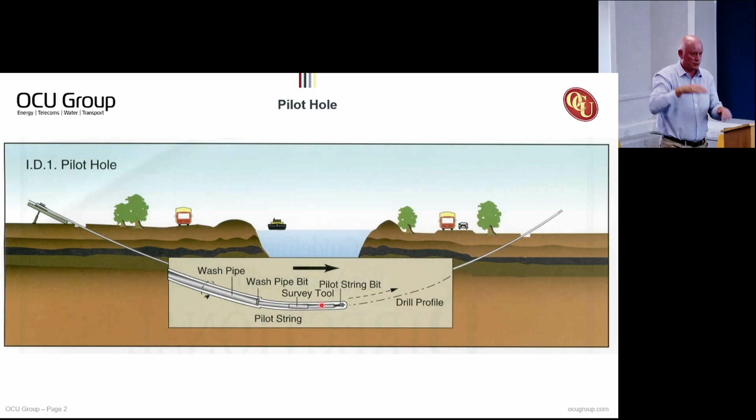But with a real-time steering system behind us, we'll see us deviating from the intended trajectory, and we can correct for it, adjust the drill bit orientation, and through a combination of rotating the whole drill string and sliding the assembly into the ground, we can follow the planned bore path.

So once we've got a pilot hole through from entry point to exit point, we take off the steering system and the pilot hole drilling assembly, and we put a hole opener or a reamer on the far side, and we pull that back towards us. And as we pull that towards us, we add drill pipe on at the far end, and we might pull 2 or 3 reamers through. The onshore drills on Orkney will be conducted like this.

We'll drill with a 6 3/4, 7 5/8 inch pilot hole, and then we'll hole open to 15 inches, and then we'll hole open to 20 inches, and eventually we'll get a 26-inch hole that's big enough for the cable duct bundle.

It's slightly different at Warebeth because we're trying to minimise the amount of work we're doing out at sea, for health and safety reasons, the weather window you need to work out there, and for cost. So we're trying to do as much as we can from the onshore position.

So for the landfalls, we've drilled the pilot hole and stopped just short of punch out onto the seabed. We've pulled the assembly back and we're forward reaming, we're pushing the hole openers into the ground and opening the bore up first from 12 1/4 inch pilot hole to 26 inches, and then 26 inches to 36 inches before we push the 630mm cable duct into the bore. So we're trying to do as much as we can from an onshore location there, so it's slightly different.

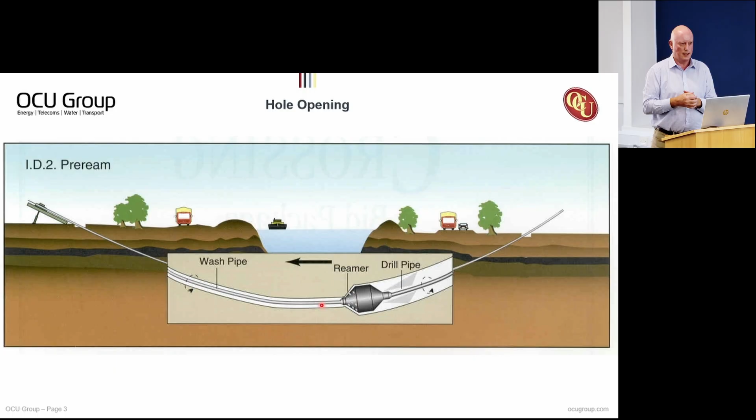But, yes, can I just ask, it's a technical question. So when you describe the angled turn, if you like, am I right in thinking that the hole diameter at that point will be the diameter of the drill bit, but when you straighten up, then it drills a slightly bigger hole because the eccentricity has to go around the whole diameter? Is that right? So the hole almost is thin at the turns and then thicker on the straight bits.

That's correct. But once you've drilled, we very rarely drill from entry all the way to exit. Every now and again, you'll stop. As we're drilling, we pump the drilling fluid down the drill string. It not only powers the downhole motor, it comes out through nozzles in the drill bit and it carries the cuttings out of the bore. If you can't remove the cuttings from the bore, you don't have a hole down there. So you're suspending those cuttings in the drilling fluid.

Every time you stop, the joints of drill pipe are 9.5, 10 metres long. So every time you stop pumping to put a new joint of drill pipe on at the drill rig, you're relying on the drilling fluid to suspend those cuttings. But when you're drilling horizontally in a 12 1/4 inch bore, they've not got very far to fall before you build up a cuttings bed on the low side of the hole. So you need to keep agitating that and putting the cuttings back into suspension.

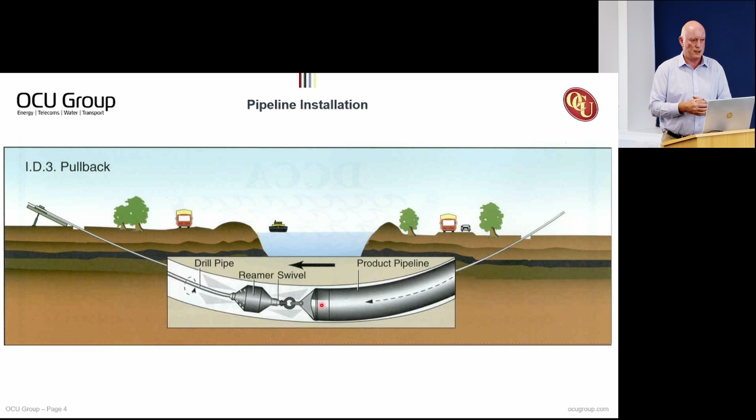And the reason we build that in a single go is when you start pulling the pipeline into the ground or the cable ducts into the ground, you lose all the mechanical control over the bore because you're pulling the drill pipe and the hole openers out. So if you start to lose borehole integrity behind you, it's very difficult to do anything about it. So you want to get that product line in as quickly as you possibly can. So you don't have the time to stop and weld and test and pull another 10 metres and stop and weld and test. You need to pull it in as soon as you can before the quality of the bore starts to deteriorate.

Can I ask a question? Yep. At Warebeth, you're saying you're pulling it out to sea. Yeah, but pushing the pipe in. You're pushing it rather than pulling it in, yeah. Okay. And then at the last stage, you're going to cut through into the seabed and let the water in. Yes. Well, once we've got the hole up to 36 inches, then we'll punch through out onto the seabed and finish that last section of drilling off, pull the drilling assembly out and push the cable duct in. Okay. At that point, it floods, presumably, yeah.

Yeah, of course it is. When we're pushing the duct in, yes, it's got vents in the front of it that allows it to fill. Because if you push an empty sealed pipe in, it would float in the drilling fluid and the water, and it would push itself against the high side of the hole. And you wouldn't be able to overcome those friction forces pushing it in. So yes, as we push it into the ground, we allow it to fill with drilling fluid and with seawater so that it reduces the buoyancy and takes a lot of that frictional drag off the high side of the hole. So yes, it's going to be full by the time it's pushed in. Okay.

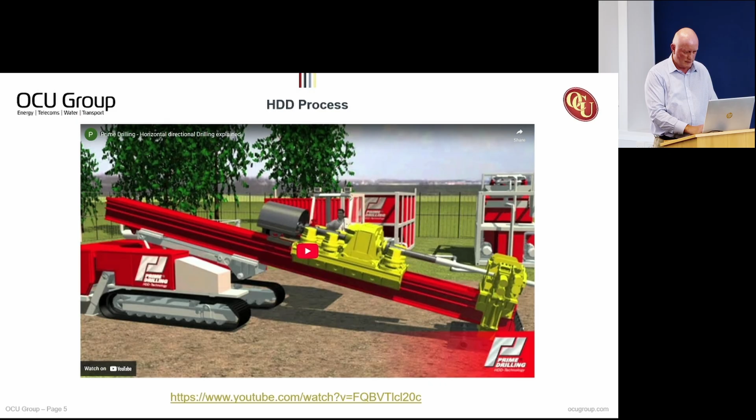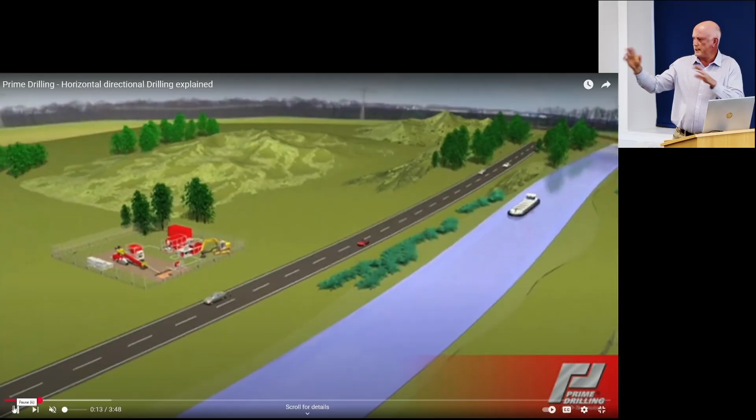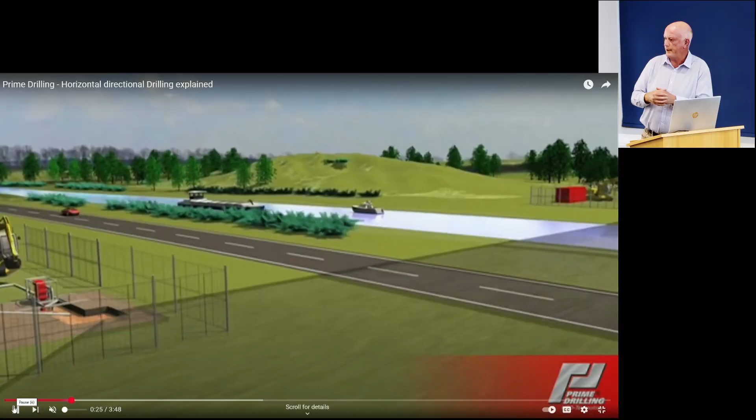Excellent. Okay, so I've got a wee video here that goes through this. So this is a wee schematic of the HDD process. And you can see that the first thing is that the only excavations we have are these small pits. We talked about pumping drilling fluid down the drill string that carries the drill cuttings back out of the bore. So these small pits at entry and exit point are the only bits that you would see on surface.

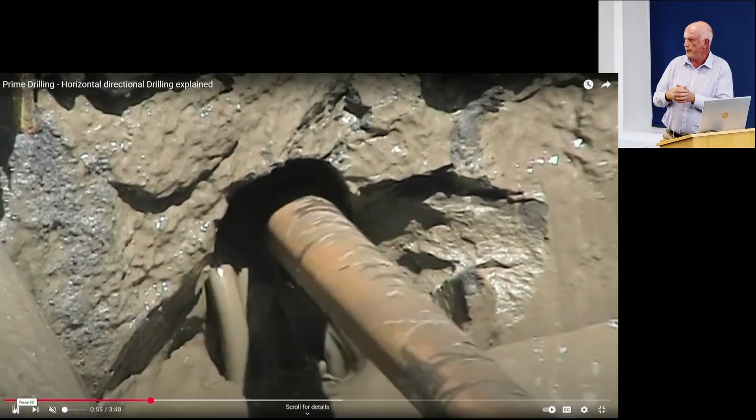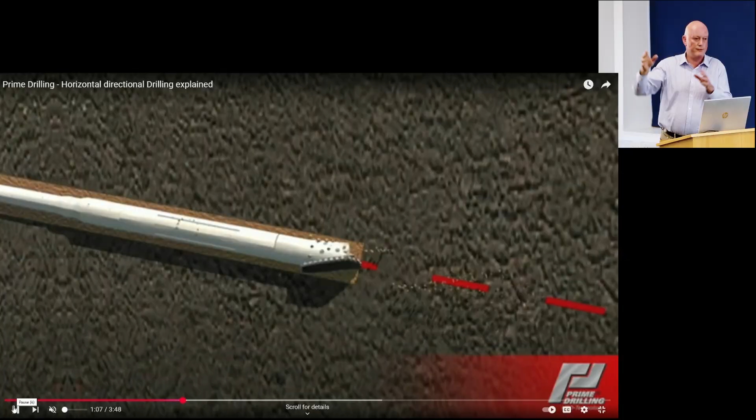So we're adding the drill pipe as we push the assembly into the ground. And we're following the trajectory. There you can see the drilling fluid coming back up the annulus, carrying all the drilled cuttings with it. That slurry, the solids laden slurry, we pump to a recycling system, and that removes the solids fraction and allows us to reuse the clean mud. So it minimises the volume of water or volume of fluid that we have on site. So is that bentonite you use as a fluid? Yeah.

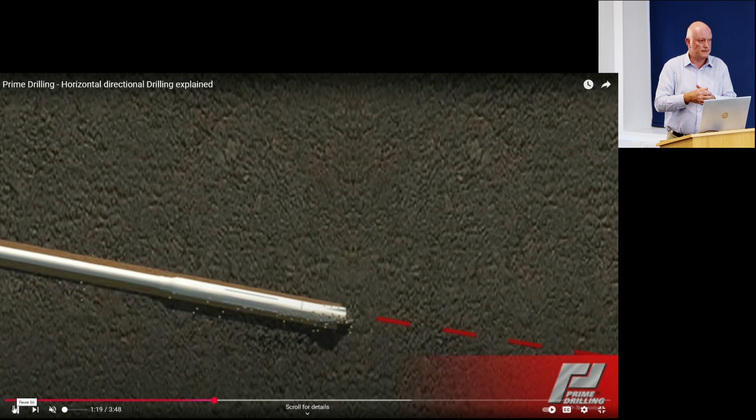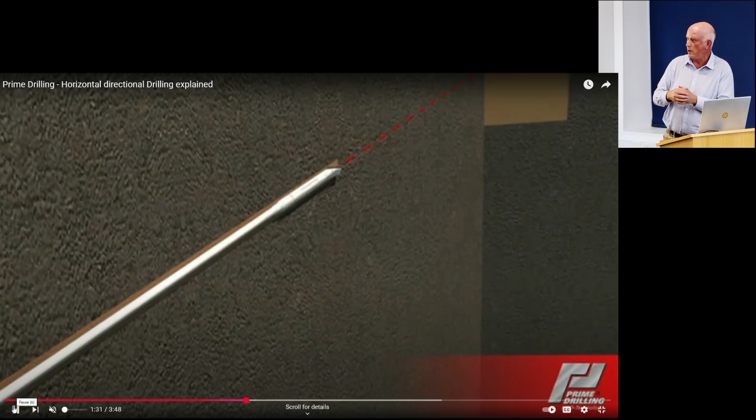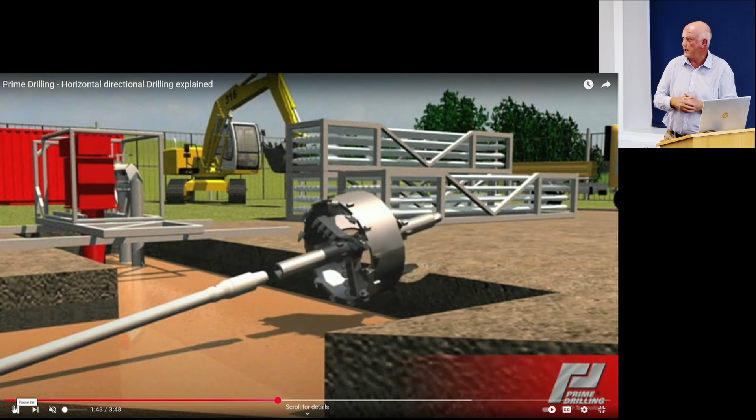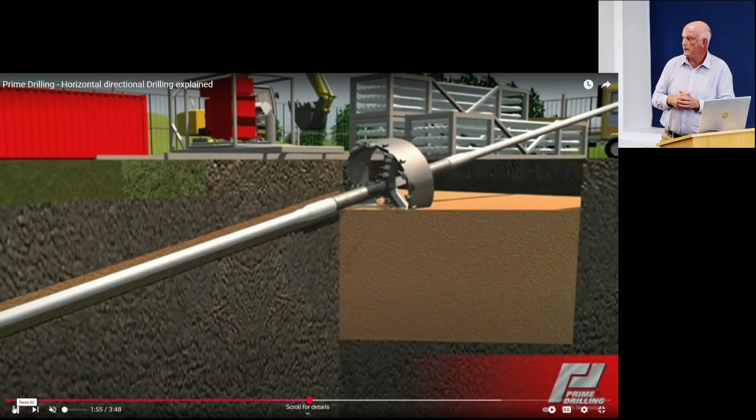And here we can see the rotation of the drill pipe following the bore path. And as we start to deviate from the bore path, we stop. Well, that's stopping to add another joint of pipe. But the previous bit, you could see the drill pipe sliding rather than rotating. And once we get to the exit pit, we take off the pilot hole drilling assembly and we pull the hole openers back towards us. Again, pumping fluid into the bore, out through nozzles in the hole opener, and flushing the drill cuttings back to surface.

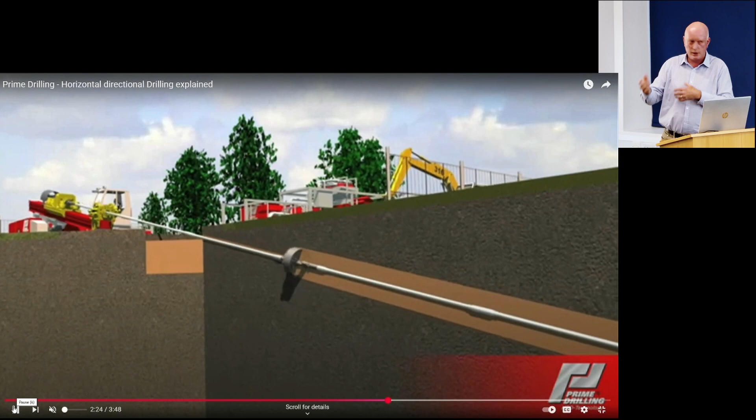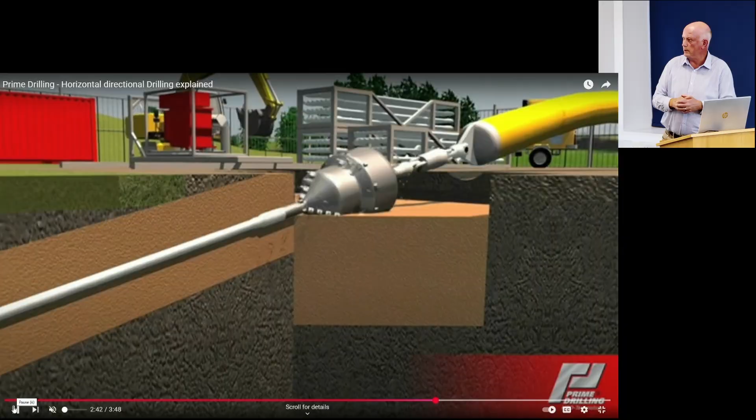So now, because we've got a larger bore behind the drilling tools, the drilling fluid is taking the path of least resistance, which would be up through the big hole rather than forwards through the small hole. So we have to have a system of management of drilling fluid to get the fluid from the exit point back to the entry point, usually done with tractors and tankers on small, relatively small bores like the onshore drills at Orkney. And then once we're back at entry point, we put another reamer on and a swivel behind the reamer so that you can rotate the reaming tool, but the pipeline or the cable duct bundle behind it doesn't rotate.

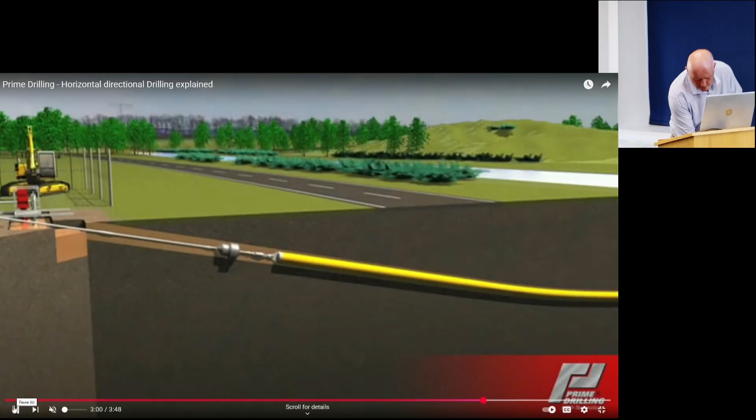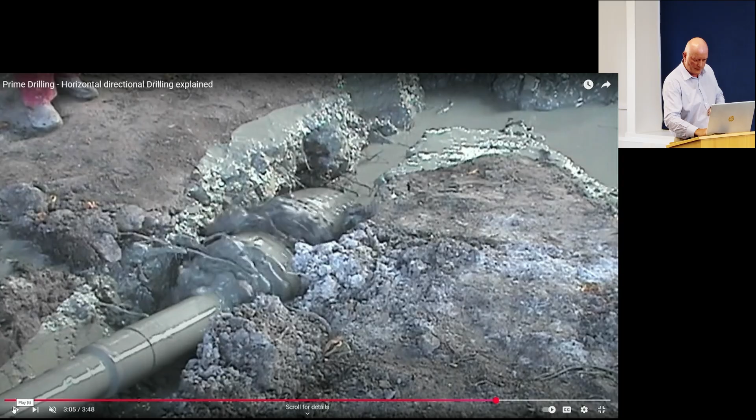So Ross, at Warebeth, this is going to be a pushing job rather than a pulling job, is that right? Yes, yeah. So we'll show you in a few slides' time the pipe pushing system that we'll use to push the sleeve in the ground. And there you can see the reamer arriving back at surface.

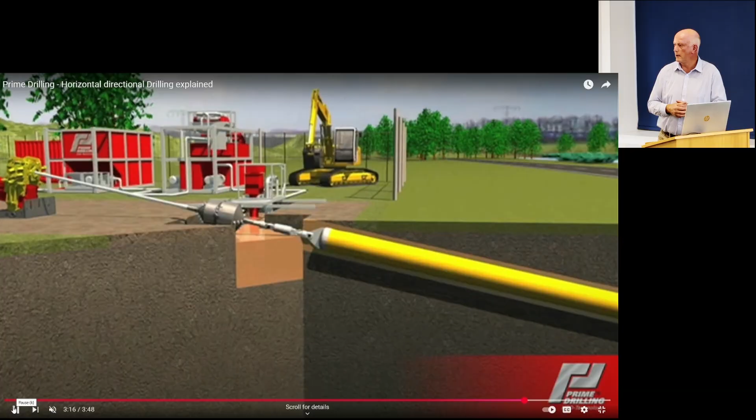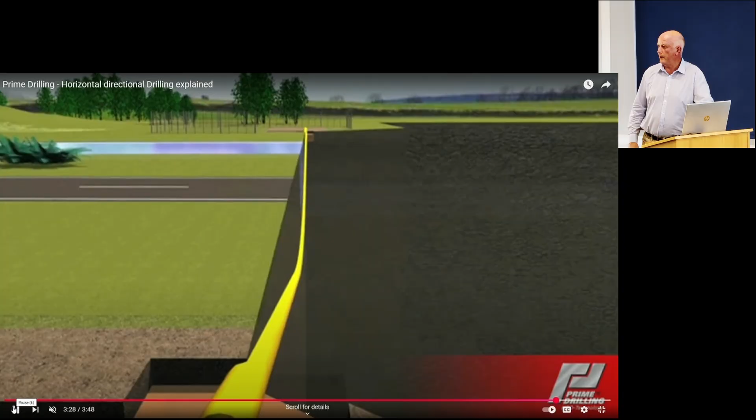Remove the assembly, cut off the end of the pipes, and what you're left with is a horizontal directionally drilled sleeve beneath the roads, the rivers, railways, motorways, coastline at Warebeth, for environmentally sensitive areas.

What sort of depth are you drilling down to there? Your measured depth versus TVD. So we'll say that again. Who's talking TVD? So you've got some experience.

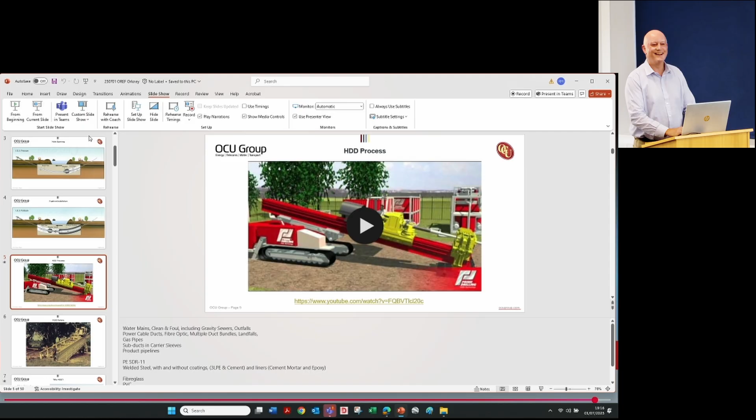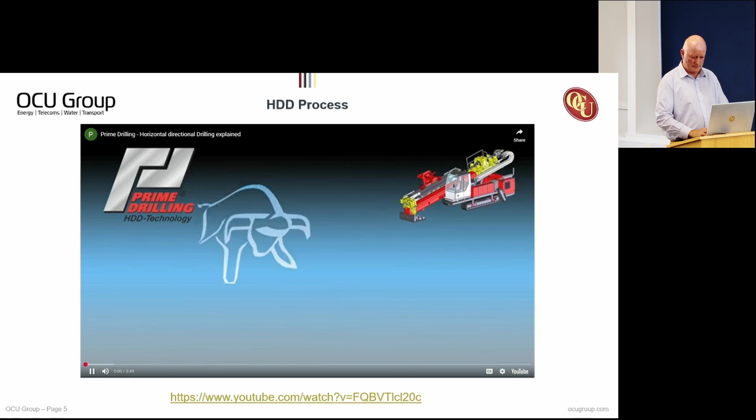So at Warebeth, we're 20 metres below surface level for the majority of the bore. For the onshore drills on Orkney, we've got a 10 metre limit, apart from the burn of Stennis. One of the issues we have with high voltage power cables is they generate quite a bit of heat, and you have to be able to dissipate that heat into the surrounding formation, otherwise they act like a fuse and they just pop. So the electrical engineers have designed the cables and stipulated that we have to be shallower than 10 metres, otherwise the cables can't dissipate the heat into the formation.

The formation at the burn of Stennis is slightly different. The thermal conductivity of the ground there is a bit less than it is at all the other onshore drills, which is why we're limited to 7.5 metres depth of cover.

From a directional drilling perspective, we would always want to be as deep as we can. The deeper you go, the more competent ground you get into, the further away you are from any surface infrastructure. You don't have to worry about heave or settlement or disruption of other services. And when you're drilling an arc, going another 10, 20 metres deeper is only going to add a metre and a half, couple of metres to the length of the drill.

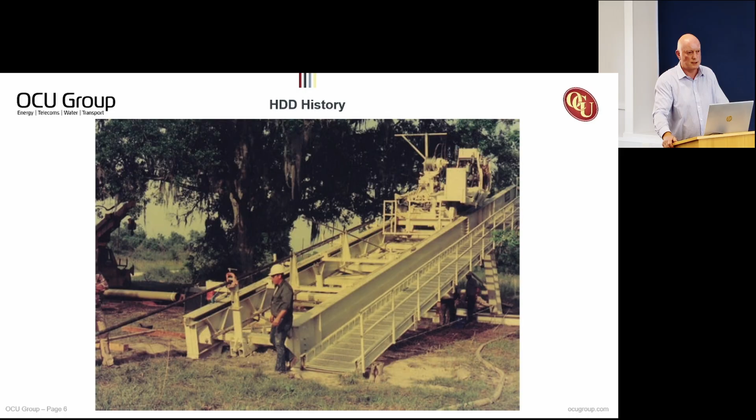So why do we directional drill? Well, obviously we're trying to avoid sites of engineering difficulty, SEDs, we call them in the civil engineering business. So that might be a road, a motorway, it might be a railway, it might be a canal, it might be a river. It might be a site of significant environmental interest.

You might be trying to avoid invasive species. We do some drilling where we drill underneath Japanese knotweed, for example. We do some drills where we drill underneath ponds that have got great crested newts in them. We do quite a bit of work in brownfield sites, putting pipelines and cables underneath contaminated land. You don't want to be trenching through ground that's heavily contaminated. We did a job in Doncaster in the locomotive works where the ground is full of asbestos they used to use to lag the old steam train boilers.

But by drilling beneath the asbestos, you can avoid all that environmental impact. But there are other applications as well, social implications. So rather than trenching down the high street and disrupting all the traffic and the business access, we just take a pit out at either end of the high street and drill down. We can avoid schools, we can avoid sports pitches. So there's a lot of social reasons for

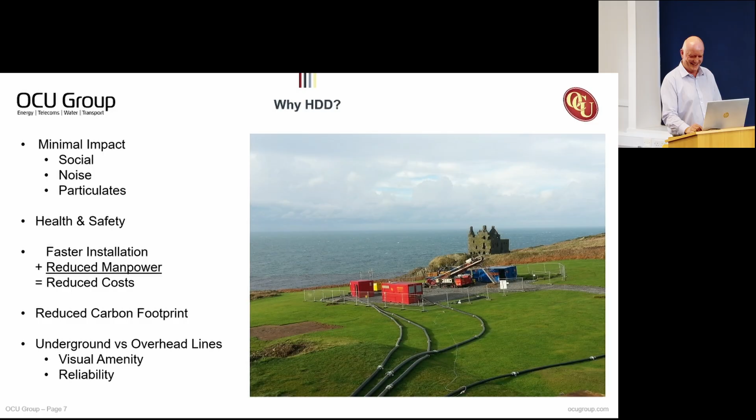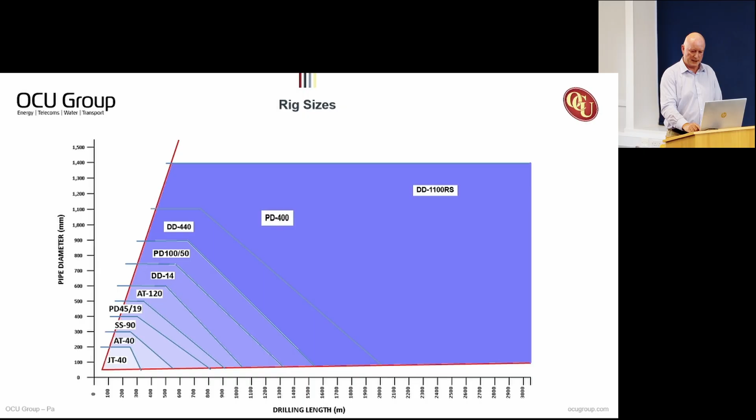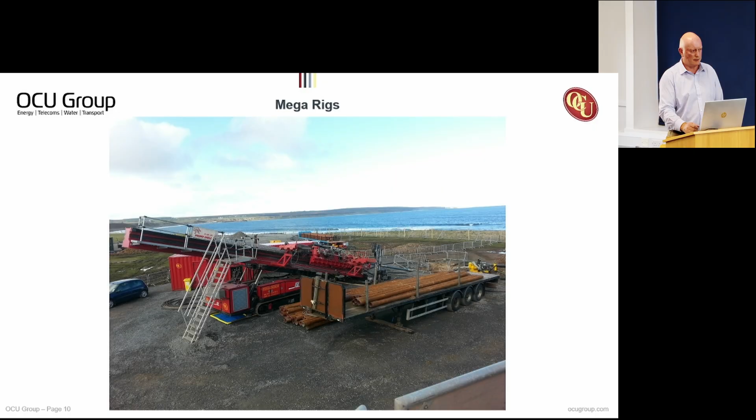Here's a couple of pictures. That's a mini rig doing a railway crossing in Cumbria, and there's a maxi rig. That one's on the Caithness coastline, putting in the MeyGen tidal turbines. I don't know if you're aware of that scheme.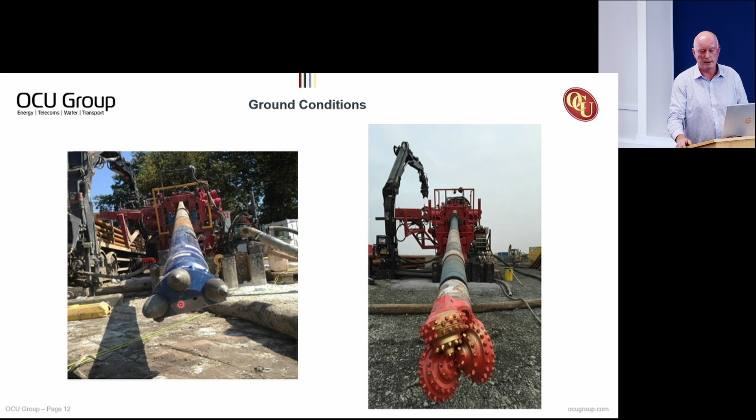So the hole openers, and again, as we say, they come in different sizes. You pull a series of them through. You don't want to open that hole up in one go because you would overload the drilling fluid with drill cuttings and make it too heavy to pump. So you take it out a little bit at a time. And there's an infinite number of different styles of hole opener and drill bit available, depending on what ground conditions you're drilling through.

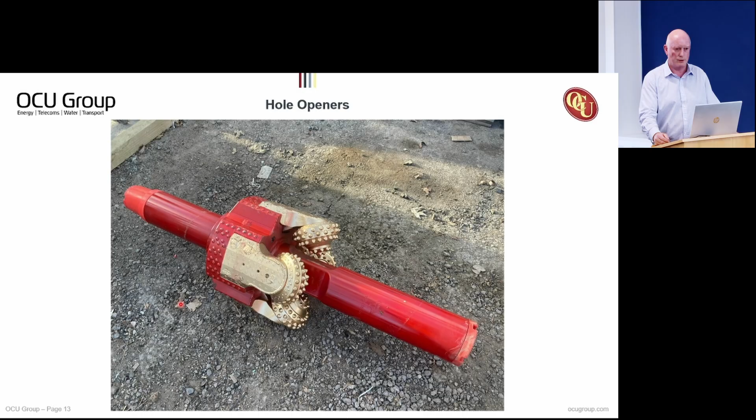The drilling fluids, we talked bentonite drilling fluid, so it's clay platelets mixed in a fresh water suspension. There's a little bit of viscosifier in there to help the carrying capacity, but it's quite a complex fluid. What you're trying to do is get that fluid to suspend the cuttings as soon as you stop pumping it. So it's thixotropic in effect, but you don't want it to set too quickly or too strongly, otherwise it takes too much pressure to get it going again. So it has a very quick gel strength, but a very low shear strength.

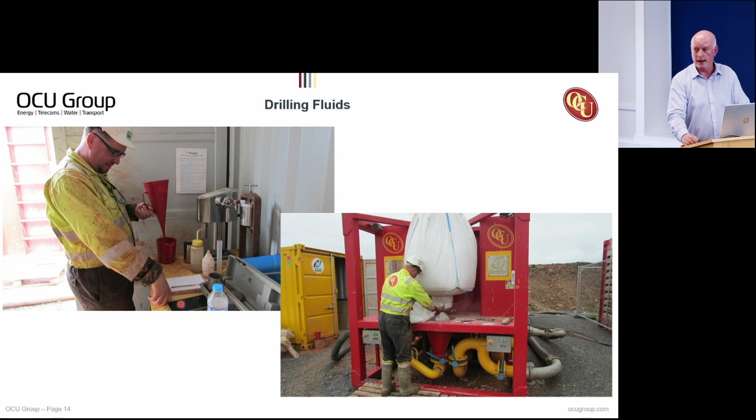If you think of it as like trying to get the ketchup out of the bottom of the bottle, and you keep banging away, and then the shear strength goes and you get all the ketchup at once. That's exactly what we're looking for. High gel strength, but low shear strength. And it also has to cool all the downhole drilling equipment. It has to lubricate the drill string, and it has to support the bore as well. So you can see in the top left-hand corner, that's the fluids technician. He's constantly measuring the viscosities, the weights, the densities, the pH, the chloride content of the fluid to make sure it's doing what we want it to do.

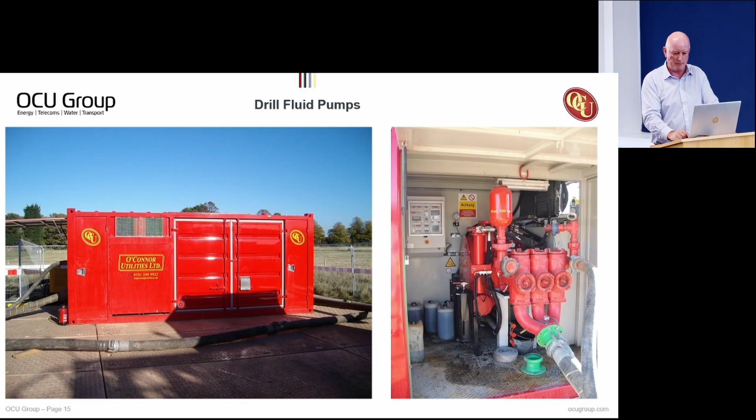These are the pumps. We've got some bigger pumps down at Warebeth than these ones, but these ones are oil field style cement pumps. And this is the recycling system. So the slurry laden fluid comes back to surface. We pump it up to the right hand shaker here, and that removes the coarse material from it. And the clean mud drops down into the tank and gets pumped up through a series of shakers. Now, the shakers are different sized vibrating screens, and they get finer the further down the fluid stream you work. So it gradually takes out more and more of the solids.

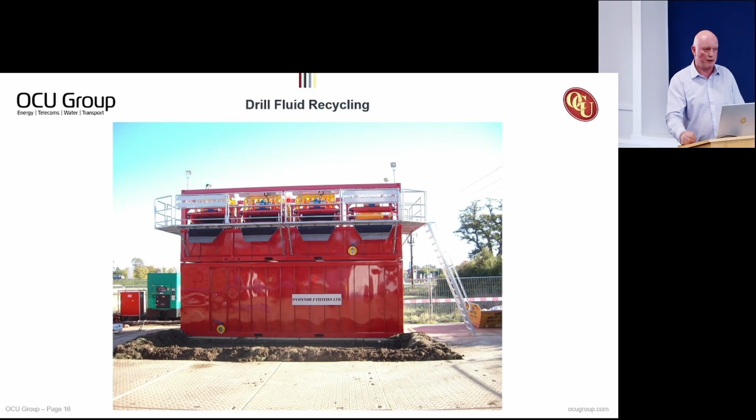And also on top of those, the last three here, you can see there's a series of hydrocyclones that spin the fluid, acts a bit like a centrifuge and spins the solid content out of it. So that takes the solids down to about 25 micron, which is clean fluid. The last thing we want to be doing is pumping dirty fluid and sands through our pumps and downhole, through the motor, through the steering tools, and wearing them away. So it's very important that we maintain a clean drilling fluid.

Of course, you've got the butt fusion welding of the cable duct. This is what you'll see snaking over Outertown Road, but it'll be the same process for the smaller ducts on the onshore drills. These polyethylene sleeves, they're heated up both ends, and then they're pushed together and they weld together, they melt together and form a single joint.

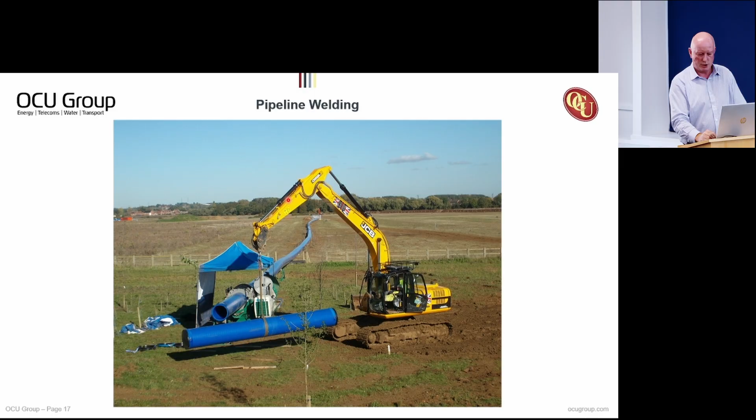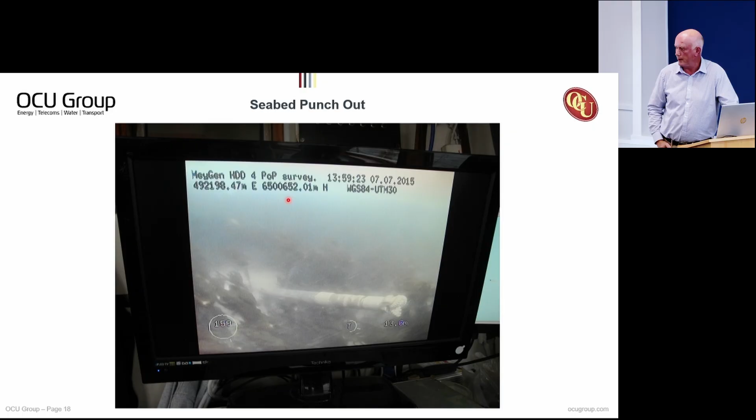So that's a picture of the drilling assembly popping up on the seabed in the kelp forest on the MeyGen job on the Caithness coastline at Ness of Quoys, Gills Bay. You can see the kelp in the background there, and the drilling assembly with the drill bit coming out of the seabed.

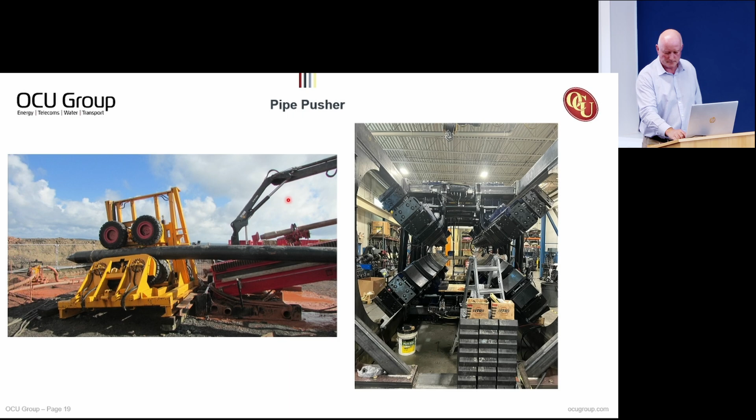So some of the design work we do, before we decide where we're going to drill, we need a topographic survey so that we can make sure we're going in at the right angles and building at the right radiuses and staying deep enough below any obstructions that we're trying to drill under. We do site investigation to figure out what the ground conditions are. The ground conditions dictate what sort of drilling tools we're going to need. The drilling tools dictate how quickly we can build angle, develop radiuses in the bore and how long the job's going to take, which tells us roughly what it's going to cost. So without the site investigation, that's a very important building block in the design process.

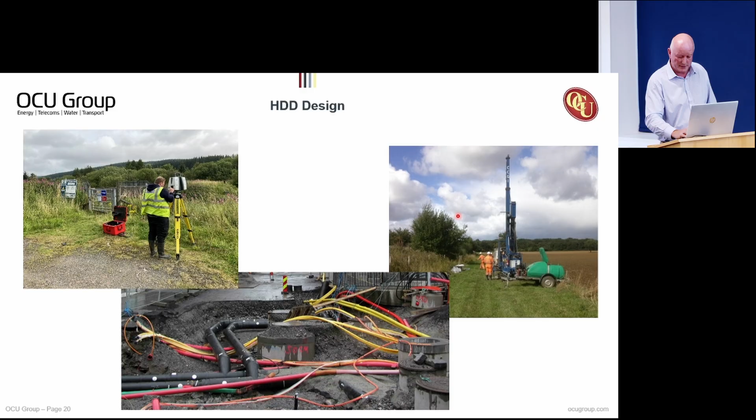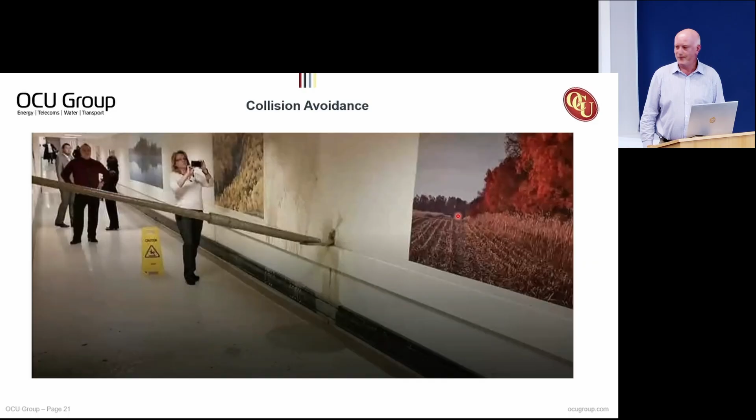The other thing we need to know is what else is in the ground. Especially in urban environments, there's an awful lot of infrastructure already in there. Unless you know where it is, you can't avoid it. So we spend a lot of time trying to trace existing utilities and pipelines, foundations, sheet piled walls. This is what happens if you don't do your survey work correctly. You can see a directional drilling assembly going through a subway. Not the smartest thing.

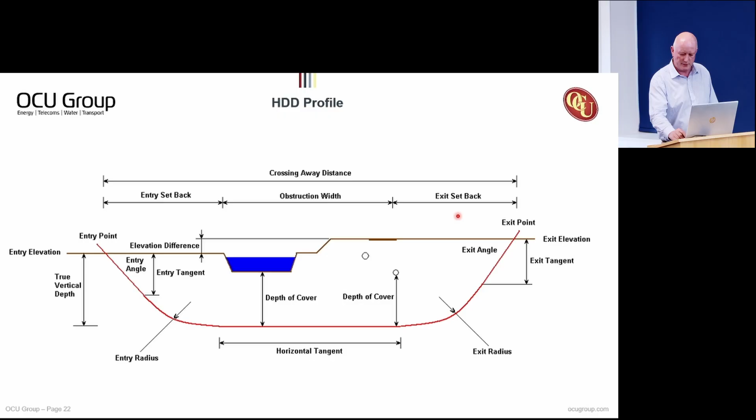The design work we do, again, some of these items are fixed: the topography is fixed, and depth of cover is often dictated by Network Rail or Transport Scotland for depths. Other things that we can play around with a wee bit: entry angles, build rates, lengths of tangent, etc. So there's quite a bit of maths and geometry involved in designing an acceptable profile. This is what happens if you get your profile wrong and your drilling assembly comes up in the middle of a motorway. Again, very American, not us.

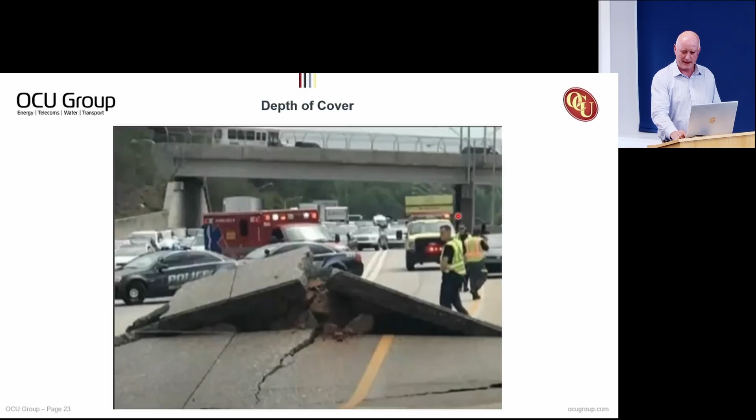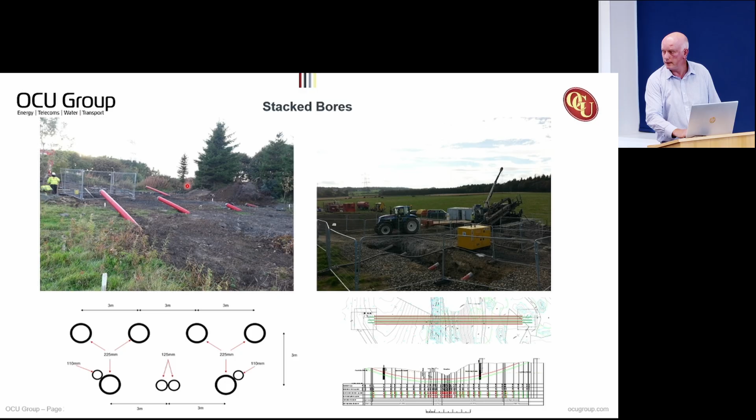We can also stack bores. So this is an example of a job under a railway. This is between Edinburgh and Glasgow, where the easement width wasn't wide enough to put the shots in flat formation. So we've had to stack them, some of them deeper than others. And you can see the shallow ones here and then the deeper ones coming out of the ground at the back of the slide there. So we can be quite innovative with the way the jobs are put in.

We talked there about depth of cover and being limited by power cable heat generation. We can put thermal grouts in the annulus to help us wick that heat away from cables. So that's sometimes a solution to enable you to go in at deeper depths than the electrical engineers might have wanted you to go in at. We can also put cementitious grouts in if we've got potential issues with very soft ground and keeping the ground stable at surface under railways, for example.

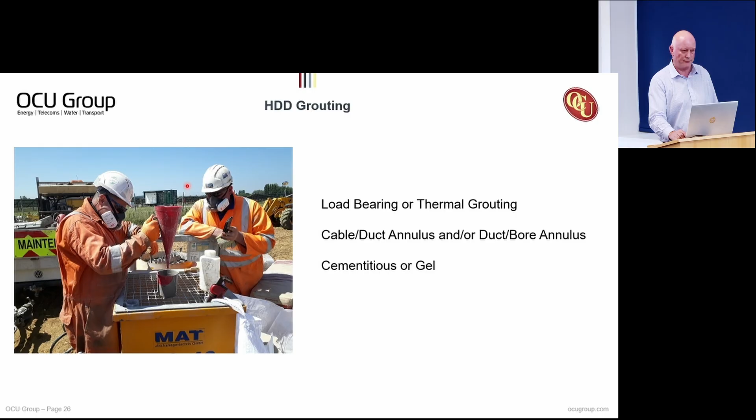So the ground that we're drilling through was a couple of... that one. So feel free to pass these around. That one broke in transit.

But you can see in here it's mid-Devonian siltstone. And if you look closely, you can see what they call bioturbation. There's some little animal burrows in there, and also the deformation of the layers of rock as more and more layers stacked up and squeezed the water out of the underlying layers. It deformed those layers slightly. So you can see the kind of density of the material we're drilling through.

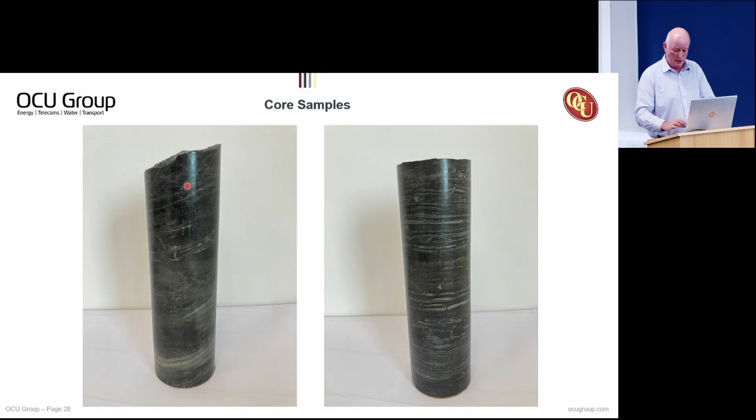Ross, just on the previous slide, the longitudinal section looks like some sort of discontinuity in the geology. Yes, it's upper Stromness flagstones. There's a fault line about two thirds of the way out, right? That faults the upper Stromness flagstones up. So we're staying in the top of the upper Stromness flagstones all the way out.

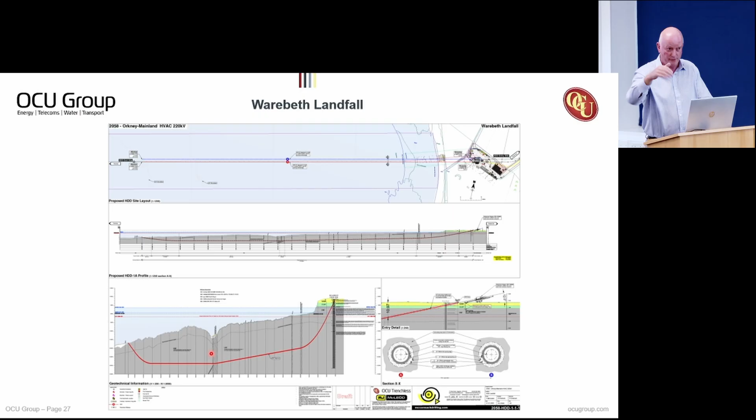I understand from the drillers that we were making ROP of about, so the first 700 metres was about 50 minutes per 10 metre rod, and then when we hit the fault, we got into the harder formation, about 75 to 80 minutes a rod. So the further out you went, once you got beyond the fault, the rock was a bit harder.

How did you find deflection when you went into the different section of the fault? Sorry, say again? Did you have any deflection in trajectory at all? No, it stayed really well. Even either side of the fault stayed pretty similar. Okay. No problems with cave-ins or anything like that? No, or hanging, no, all good.

The other thing we always worry about drilling through fault zones is losing drilling fluid into the fault, into fractured material. But we have maintained full returns all the way through. So, yes, there's a fault there, but it probably sealed up with hydrothermal deposition or something in there to seal it up.

Well, do you come back to that fracking later on, or is this a good time to ask another fracking question? You can ask a fracking question. Yes. If the mud starts circulating through a crack, do you just let it happen until it stops naturally, or do you have an intervention that can plug that?

Okay. So one of the other reasons that we have these recycling units on site that minimise the volume of fluid we've got in circulation is it makes it easy to spot changes in the volume of fluid. So if we start to lose fluid downhole, we'll see it very quickly because we've only got small tanks of fluid on surface. Now, what that tells us is that the pressure of fluid that we're pumping downhole has exceeded the hole's ability to retain that fluid within the bore.

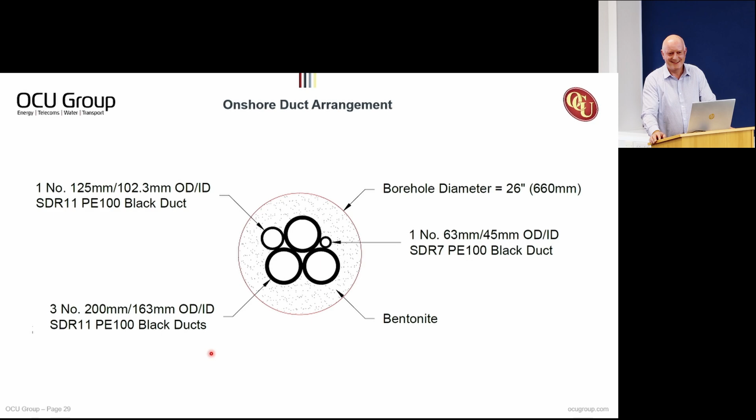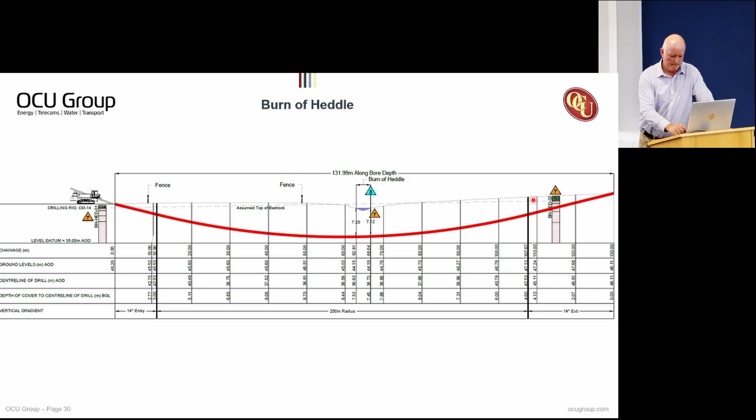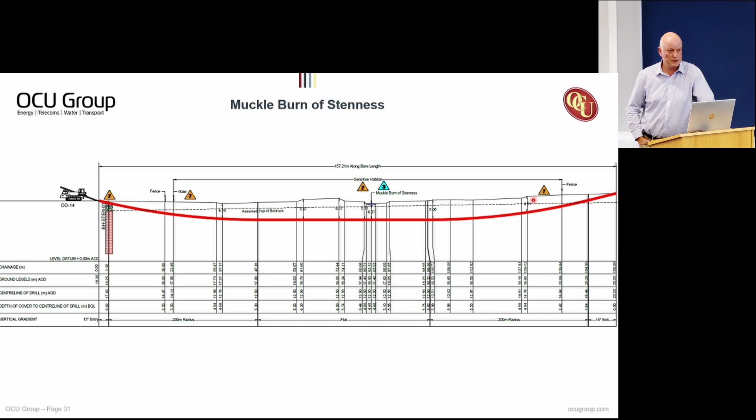The Muckle Burn of Stenness, this is the one where the thermal conductivity of the ground is a lot less than the other drills. So we're restricted to 7.1 metres depth of cover. So our depth of cover underneath the stream is only 4.4 metres. But again, we're in solid rock. You can see the assumed top of bedrock line there. And there's quite a sensitive environmental area across the length of the Stenness burn, which is why we've extended the length of the drill to 157 metres to stay out of the environmentally sensitive area.

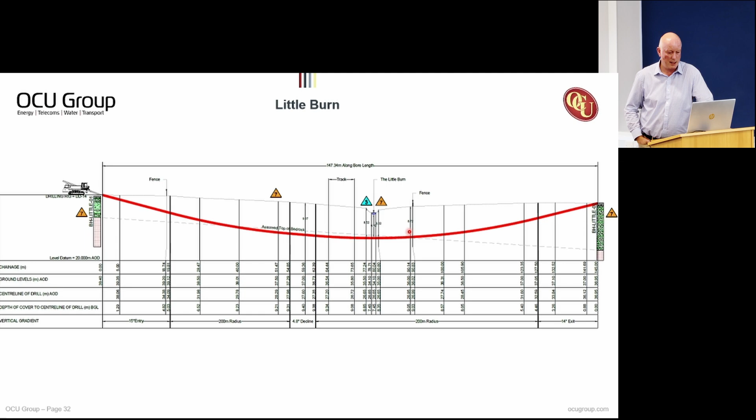The Little Burn, now this is the only bore where you can see we just kiss the top of bedrock here. So the majority of this bore is going to be drilled in the clays and sands and silts and gravels staying above the bedrock. So we've got 7.5 metres depth of cover underneath the stream there, and it's 147 metres long.

The A964 is just over 100 metres long, 102 metres long, and there's a few services in the ground there. Water, BT, there's a drain and another water pipeline on the other side. So these have all been trial holed. So we know what depth they're at, and we know what our depth of cover is beneath them.

The Bush, the inlet, the sea loch, this one's the longest of the onshore drills, 252 metres long. But again, you can see bedrock is pretty much at surface across the estuary there. So we've got plenty of depth of cover in solid bedrock.

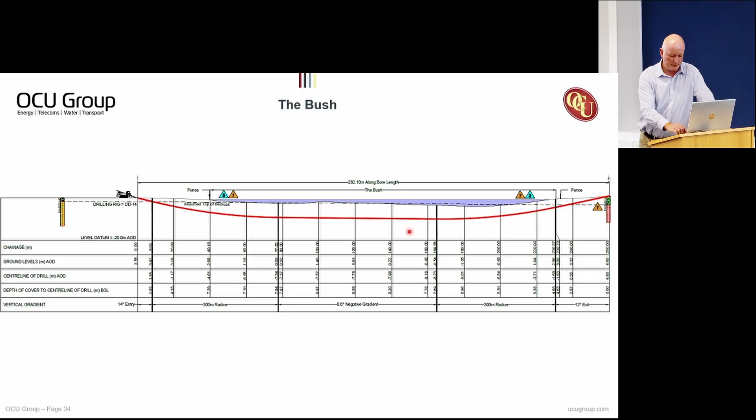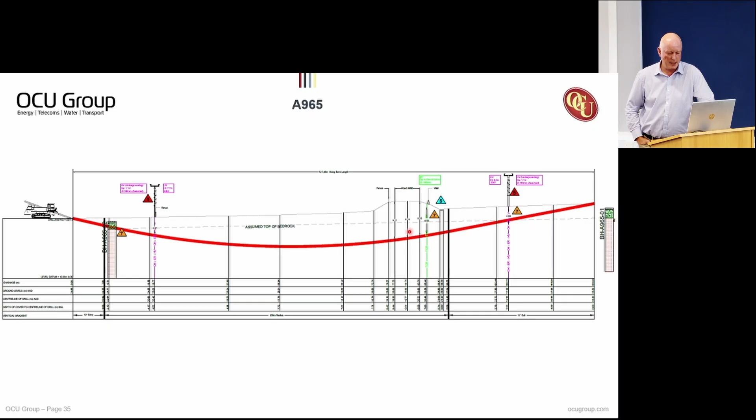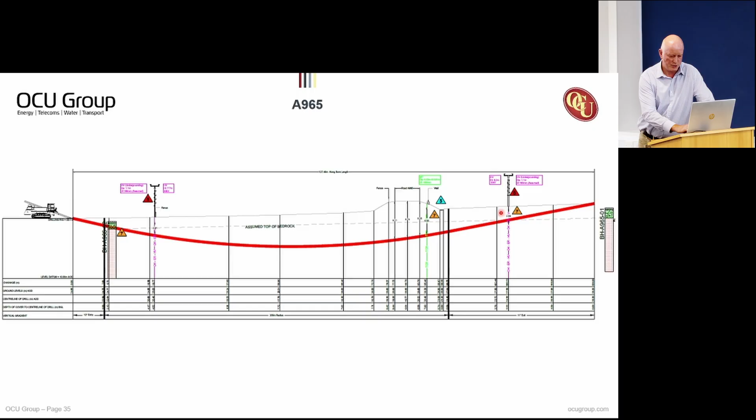The A965, the road's up on a bit of an embankment. So although we're shallower below entry and exit point on that one to keep the 10 metres depth of cover below the road embankment, we're still able to get plenty of depth of cover into the bedrock. There's a couple of overhead lines there. You can see one out here and one here. And what we've done with the design of this bore is we've put the HDD in at sufficient depth that if at some time in the future they want to underground these lines, they've still got room to do so and stay above the HDD bore. So we've pushed that one out to 127 metres to accommodate any potential future works.

And the last one is the Burn of Sunnerdy. You can see all the other services that are in the road here. Again, there's a sensitive environmental habitat at the start point that we're staying well below. And then we've got some comms, some water, some high voltage, BT. There's one unknown in there that we picked up when we were doing the trial holes, and a couple of 11 kV cables. So that's 243 metres long to stay underneath this sensitive habitat at one end, and all the existing utilities at the other.

How are we doing for time? Just gone up to 8 o'clock. About 50 minutes.

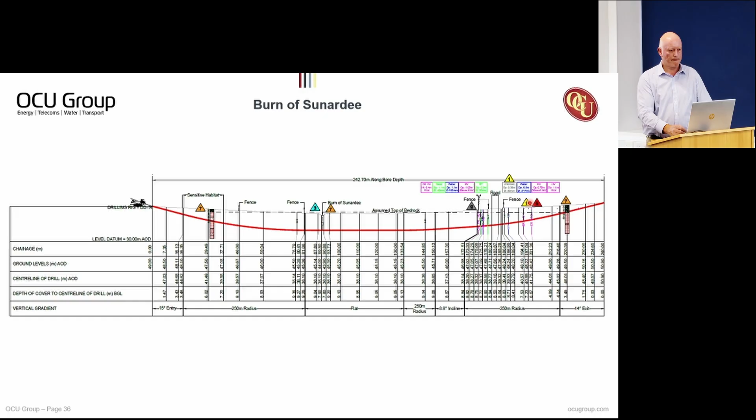SSE had 3 cables lying on the bed of the sea loch there, but as the tide comes in and goes out, they move those cables slightly and wear them away. So every 5 to 8 years they needed replacing. So we've now drilled them in 20 metres below the seabed, again in solid rock, for very similar reasons that we're drilling the cables at Warebeth, get them out of the tidal stream and protected in solid rock. And I believe they're now looking at putting an electric ferry on that crossing route because they have a reliable power supply to it now.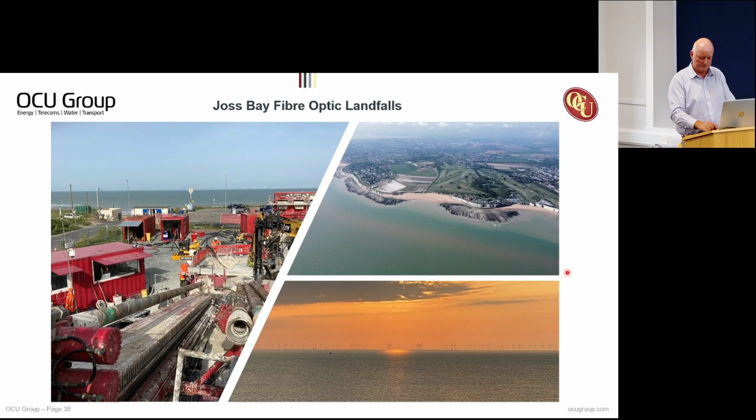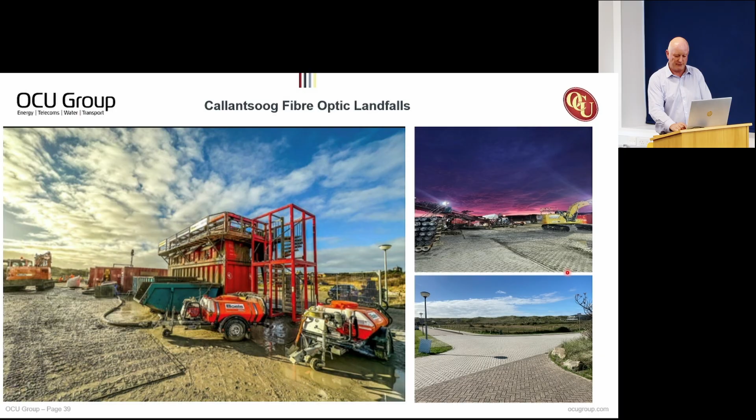The landfalls on the south coast went so well, the client took us across to Holland and had us drill underneath the Koningsdijk, the King's Dyke, one of the major flood protection barriers, and out to sea. So you can imagine the hoops we had to jump through to get permission to drill that. The stories of the little fellow with his finger in the dike don't come close. But nice job—just over 2 kilometres, that drill, 2,085 metres.

This was a job we did on the River Dee at the steelworks, Tata Steelworks. You can see the 2 drills marked as red lines here. They're replacing an old Victorian brick-built, hand-built cable water tunnel that ran under the River Dee there. These lines are all gas lines, high voltage power cables, sewer lines that we had to be careful of.

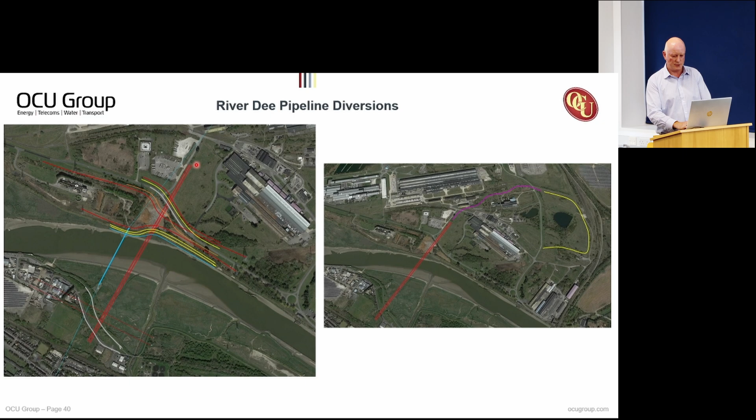But the striking thing about this job was the amount of contaminated land. We started off in a landfill site that we isolated with sheet piling. There was an old soda ash facility that dumped sulfuric acid on the ground on the southern bank. On the north bank, there's a leachate lagoon we drilled underneath, associated with the old Hawarden mine works. And where we came out of the ground, these are old railway yards with a lot of asbestos and oil contamination in the ground. So again, drilling underneath it avoided all that.

Another picture there, that's the same job.

This one's Cork Harbour. We drilled 2 parallel shots over 1 kilometre long across Cork Harbour. There was a slight horizontal shift out under the middle of the harbour to get the exit drills lined up. And again, accuracy was very important—we had a basketball court to aim for at the exit point. It doesn't look much like a basketball court there, but that was all refurbished at the end of the job. Then the pipeline was welded up in a field nearly 2 kilometres away and pulled down these narrow country roads for pullback.

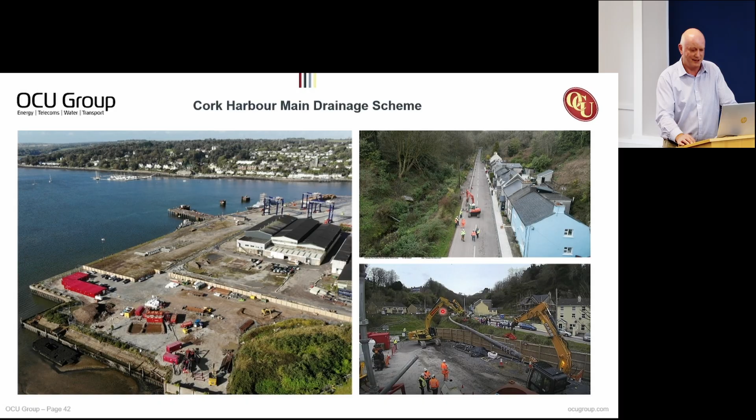The first shot, we had a stake in the ground that we were aiming for, and we were about 20 centimetres to the right-hand side of the stake on punch out. The second shot, we moved across and missed that one to the left by about 18 centimetres. One of the Irish water engineers said to me, were you happy with that kind of guidance accuracy? I had to say, I've been in pubs in Cork where the darts players don't have that kind of accuracy. So to be able to hit them from over a kilometre away, I thought we were doing pretty well.

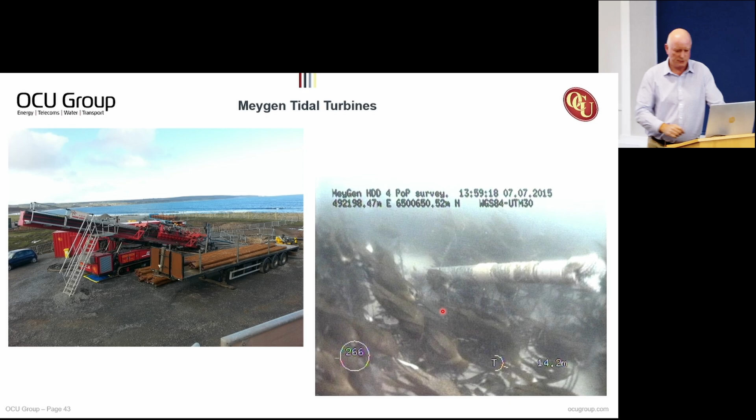Those two pictures you've already seen—that's the major landfalls on the Caithness coast. Just to give you an idea, there's some seals hauled out while we're drilling underneath them. There's very little impact—it's getting a back massage.

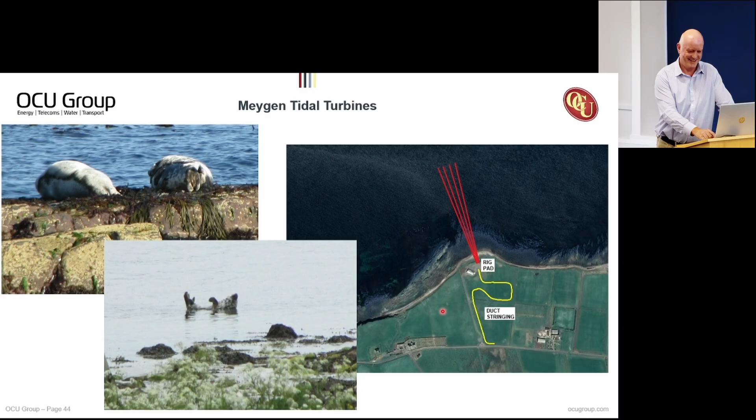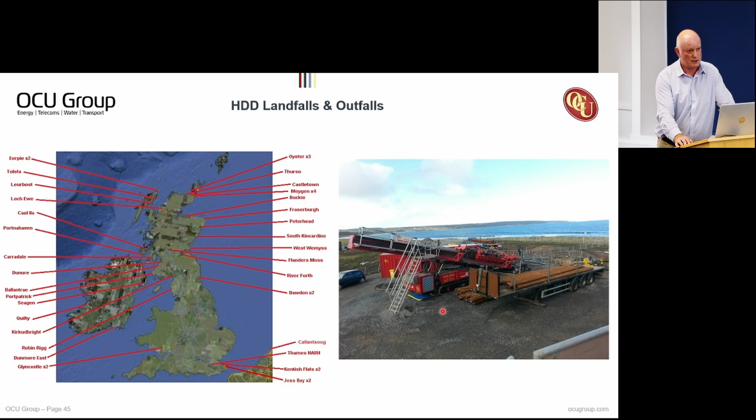As well as cable landfalls, we've put a lot of outfalls in for Scottish Water and for private industries—distilleries, pig abattoirs, paper mills. It's a very similar process. This one is for the Caledonian Cheese Dairy in Stranraer. There's an outfall that goes out at Portpatrick.

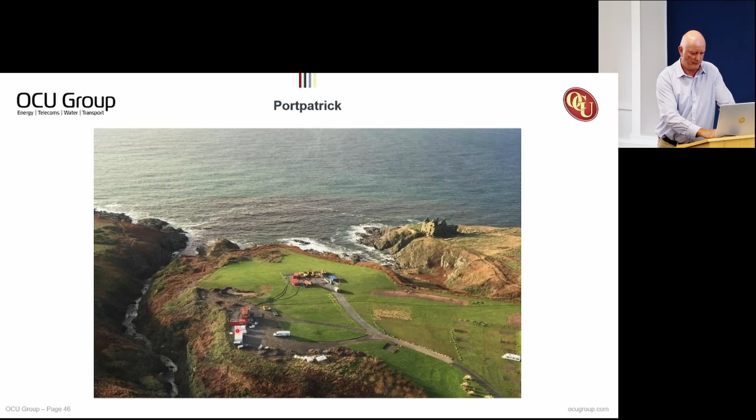You can see the rig site here split up. That's quite a steep slope, so we've got the rig on the slope and the fluid system up at the top of the hill.

Just to finish up, a couple of the more esoteric applications for HDD technology. We talked about avoiding contaminated land, but there's a lot of work being done, more so in the United States, where groundwater is much more of a potable resource, for cleaning up contamination and pollution plumes. When pollution percolates down through the ground and hits the water table, it migrates off-site in a long, thin plume. So if you can chase that plume with a horizontal well rather than putting in tens or hundreds of vertical wells, you can get much more coverage with your well screen—whether you're pumping and treating to pull that contaminant plume out of the ground, pumping air in to volatilize the plume and dissipate it, or pumping in a reagent to deal with the plume.

There's quite a bit of contaminated land remediation being done with horizontal wells. Water abstraction is another application. We've drilled a bore underneath the Thames from Beckton Sewage Treatment Works. You probably know London is short of water pretty much every year. The Thames flows through it, but it's full of suspended solids.

But by drilling a bore 30 metres below the bed of the River Thames, we could pull water down and filter it through the natural sand and gravels on the riverbed. And the water coming up out of the well was 4 times cleaner than the legal requirement for tap water in London. So that's an application that's being used quite a bit.

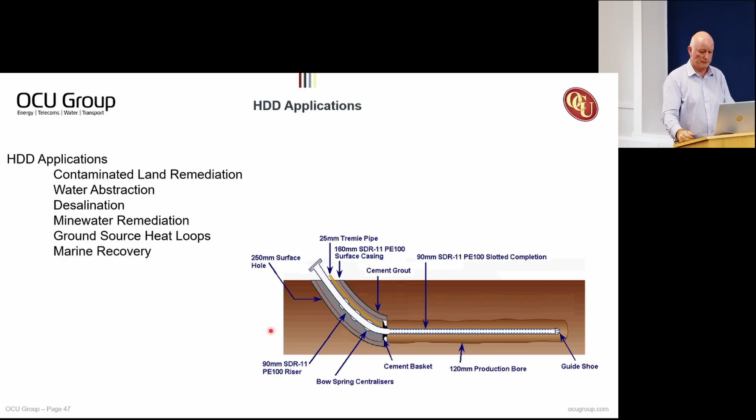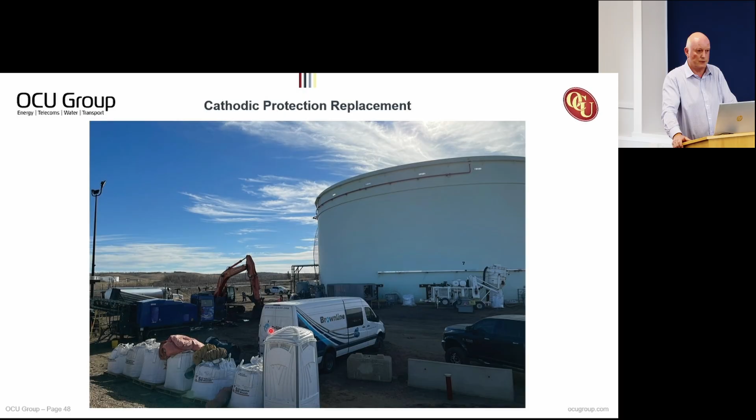So another interesting application. And cathodic protection. This picture shows steel tanks. You might be aware when steel tanks are installed, they have sacrificial anodes put underneath them that rust preferentially to the steel tanks. But once that anode is gone, the tank starts to rust. But using directional drilling, you can replace those anodes without disturbing the tank operations. And we've done something similar with freezer pipes underneath cold storage rooms that failed or got blocked up. We were able to drill under them and replace the freezer systems.

So, what about bank vaults? Bank vaults, yes. We could certainly drill into a bank vault for you. Great. Thank you, Richard.

Absolutely fascinating. Any questions from anybody? We haven't covered as well. So I've got one to kick off. Oh, I'll jump in first.

There you go. In terms of the material you're seeing in the tailings that come back, can you describe what size they are? So we looked at the picture of the recycling unit there, and it takes off a coarse fraction in the first screen. So that's kind of gravelly, small gravel-sized pieces. The next shaker down takes off a gradually finer material, so coarse sand, fine sand, and the centrifuge at the far end, it's clay coming out of that. So we take a range of material.

It's related to the drill bit and the ground you're drilling through. The size of the teeth on the drill bit dictate the size of the chips that are going to be produced. And the faster you can flush them out of the ground, the less abrasion they suffer on the way up the annulus. So we're getting pretty clean material out because a high percentage of it is coming out in reasonable sized chips. Thank you.

So then Gareth? So at Warebeth, when you punch out into the seabed and you get that mix of bentonite and seawater, how do you manage that? Sorry, once you're finished, is it all going to be bentonite, or how do you manage that? So before we punch out onto the seabed, we circulate all the cuttings out, and we'll run 1 or 2 wiper trips to get as much of the solid fraction out of the bore. So we've got pretty clean fluid to finally punch out onto the seabed.